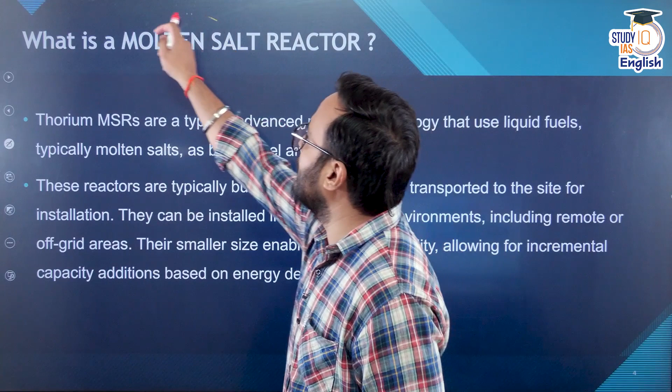Now let's talk about what is the molten salt reactor. We must have heard about various types of uranium powered nuclear reactors, where uranium is used as the fissile material, such as heavy water reactors or fast breeder reactors. There are different types of uranium nuclear reactors.

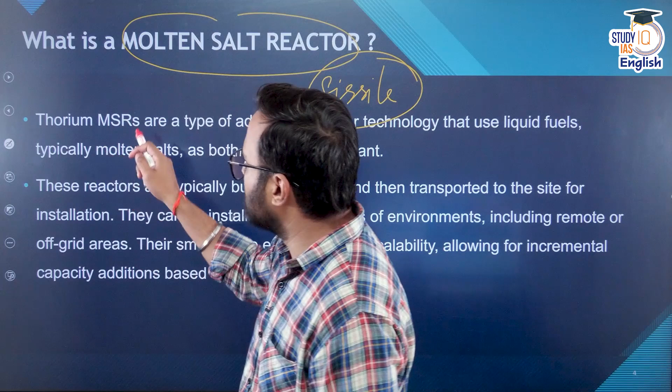However, if we talk about thorium powered molten salt reactors, these are a type of advanced nuclear technology that uses liquid fuels, typically molten salts, as both fuel as well as coolant.

The salt which contains the thorium fuel is heated up and converted to the molten state, and that salt is used as both fuel and coolant, because the inherent heat generated in this plant is lesser than in a uranium powered plant. At the same time, for the uranium power plant, due to the nature of the mineral, it was not possible to liquefy it.

However, here in the form of molten salt, there is a dual advantage: the same fuel being used in liquid form can also be used as a coolant. In uranium based power plants, usually heavy water or sometimes normal water is used as the coolant. There were incidents where molten sodium and other lighter metals were also tried as coolants, but those experiments did not succeed much. So typically heavy water was the most common coolant used in uranium driven power plants. However, here we are using the same molten salt, which is the fuel, as the coolant also.

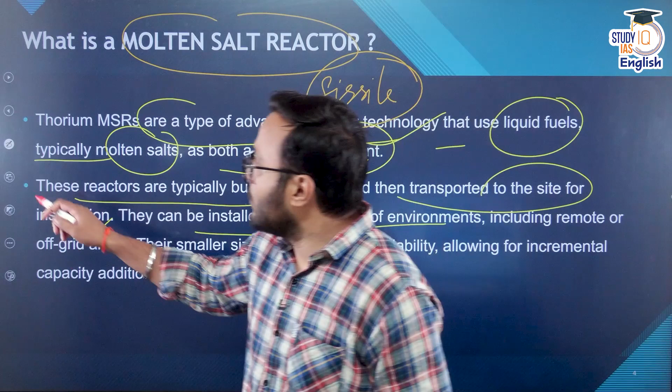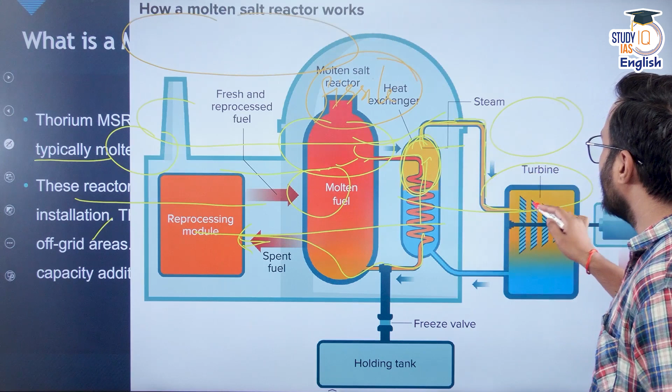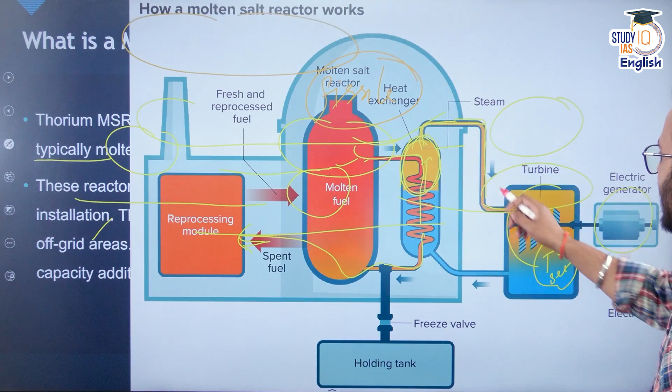So here the superheated steam is collected and moved to the turbine and generator, that is the TG set, turbine generator set. The turbine is moved with the help of steam obtained from the vapors of this molten fuel, and at the same time it moves the electric generator, producing electricity.

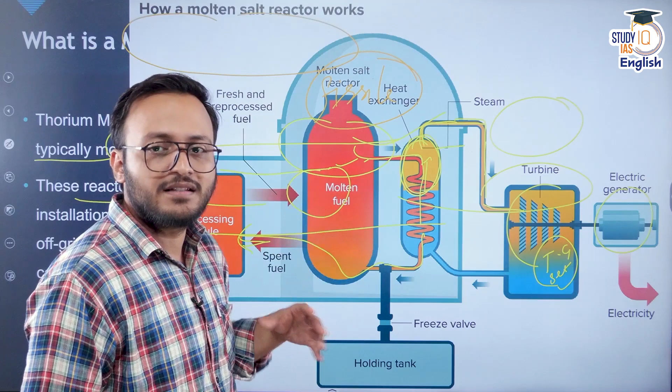Basically every power plant works in a very similar fashion. The ultimate aim is to move the turbine and the connected generator. How is the turbine moved? That's the most important part. In fossil fuel based power plants like coal thermal power plants or natural gas power plants, the fuel used to produce steam and move the turbine is fossil fuel. Here we are using molten nuclear fuel, molten salt as the nuclear fuel. Which salt? Thorium salt. I hope you got a very clear idea.

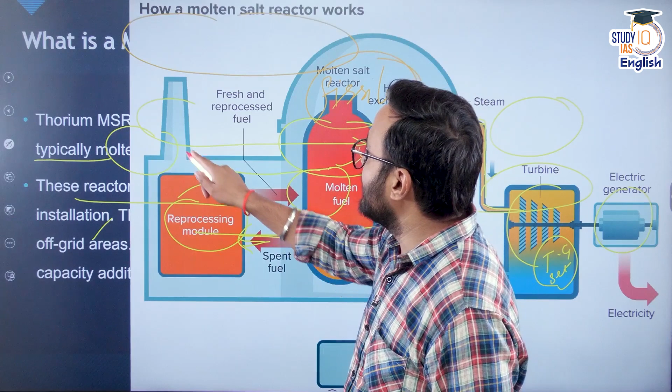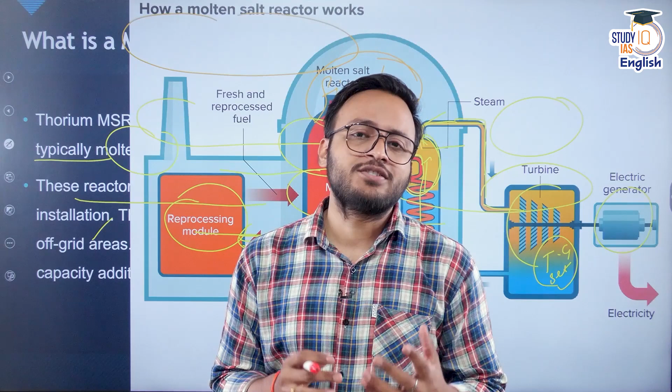Now, after the spent fuel is sent to the reprocessing module, we obtain fresh and reprocessed fuel which can be used again. This is the biggest advantage a molten salt reactor has over the conventional uranium powered nuclear reactors.

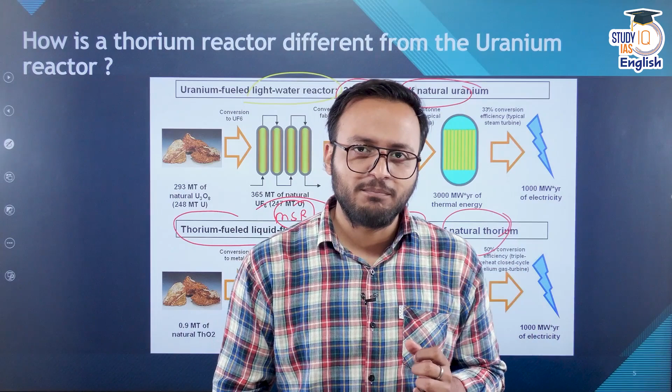The uranium obtained in the natural state, uranium-238, is not a fissile material. We have to get it enriched to uranium-235, or to uranium-239, which becomes plutonium. The 235 isotope of uranium is very scarce, so just 35 tons of enriched uranium can be obtained using 250 tons of natural uranium, giving us a huge byproduct, a huge waste. The 35 tons of spent nuclear waste needs 10,000 plus years of storage because it remains radioactive for more than 10,000 years.

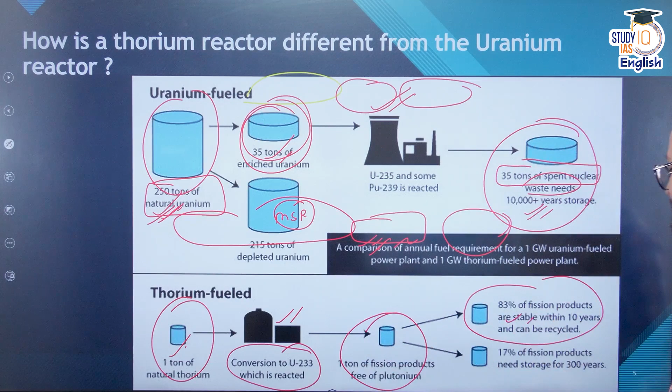Whereas with thorium fuel, just 1 ton of natural thorium is convertible to uranium-233, which is radioactive, and that 1 ton of fissile material is usable by 83%. Within 10 years, that 83% of the fuel becomes stable. Their half-life is over; they are no longer radioactive. Only 17% of the fission product used in the fuel remains radioactive, for just the next 300 years.

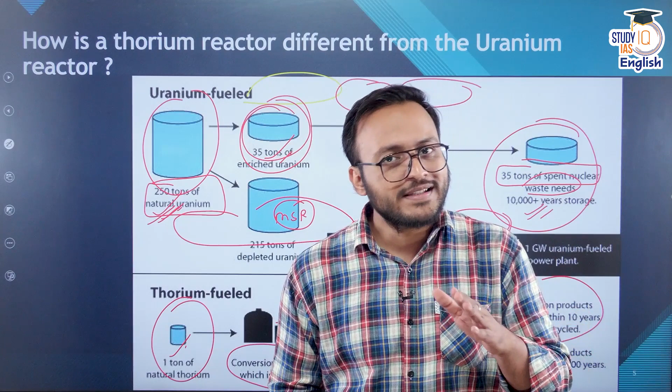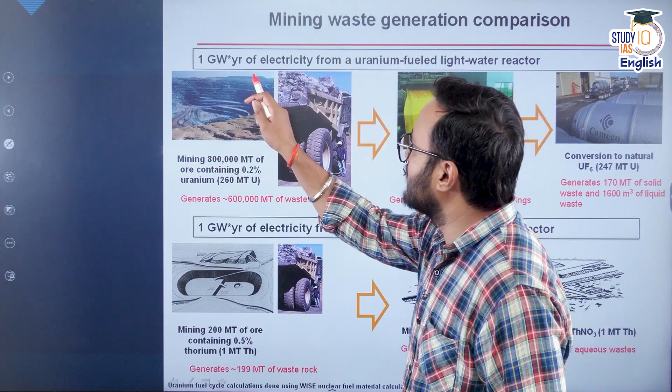So we can see from this diagram that a nuclear power plant powered by thorium produces less waste, and at the same time produces fewer radioactive materials after the fuel is spent. So overall, the waste generation in producing electricity from the uranium fueled light water reactor is very high.

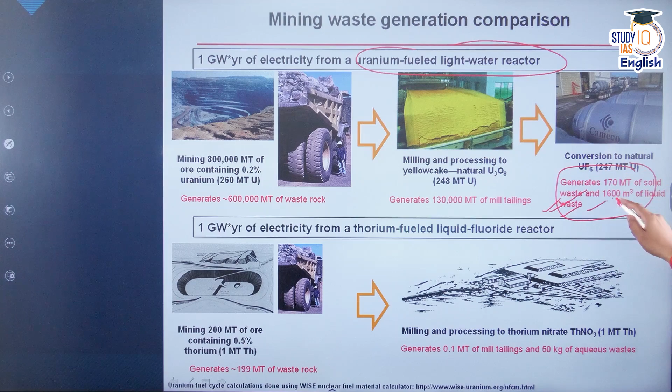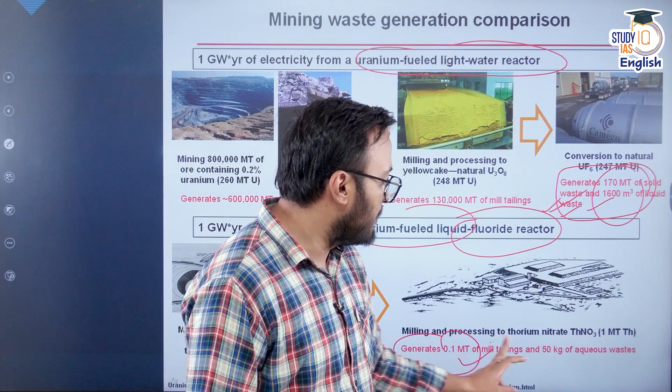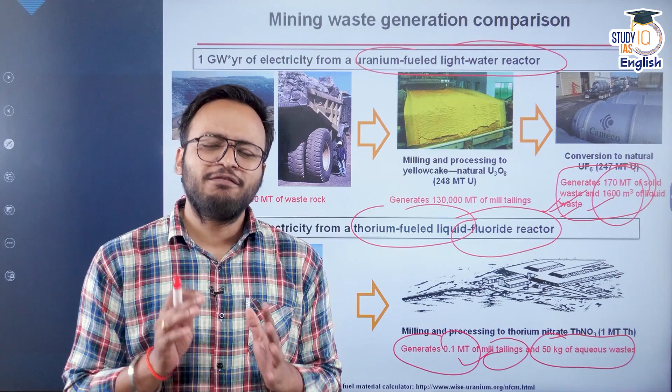As you can see, 170 metric tons of solid waste and 1600 cubic meters of liquid waste are generated. Whereas for production of 1 gigawatt-year of electricity from a thorium fueled liquid fluoride reactor, it generates just 0.1 metric ton of mill tailings and just 50 kg of liquid waste. Thorium generates very little waste. So overall, the safer future lies with thorium based power reactors.

Now let us summarize the comparative points we discussed. Fuel efficiency: the uranium reactor does very poorly compared to the thorium reactor. Establishment cost: the uranium reactor has a comparatively lower establishment cost because the technologies are readily available, not to all countries, but at least to nuclear enabled countries. But thorium reactors are still in the experimental stage, and that's why they bear a higher cost.

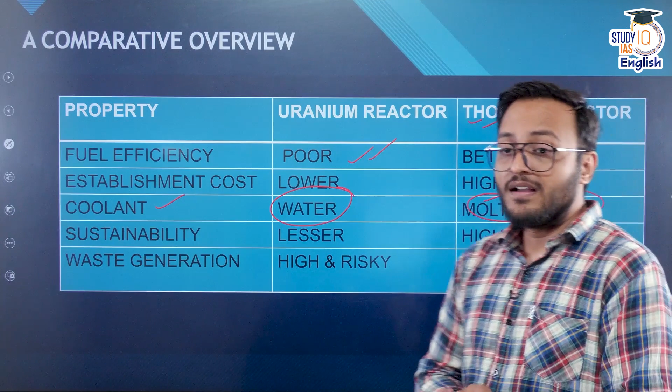The coolant used in the uranium plant is usually water, in variations like D2O, heavy water, or H2O, regular water. The molten salts used as fuel in the thorium reactor are used as the coolant as well. Sustainability: uranium reactors have lower sustainability, because we cannot rely on uranium based power plants for a longer period of time.

You might have heard the news also. Germany has decided to shut down all of its nuclear power plants powered by uranium. Why? Because the production is very, very costly. Not costly on the basis of the fuel charge or something.

Costly because of the environmental damages that it is doing. Costly because of the problems being faced while the burial of the waste that is produced. Right? So overall, we can say that it becomes a big challenge to make a sustainable utility of this reactor which is powered by uranium.

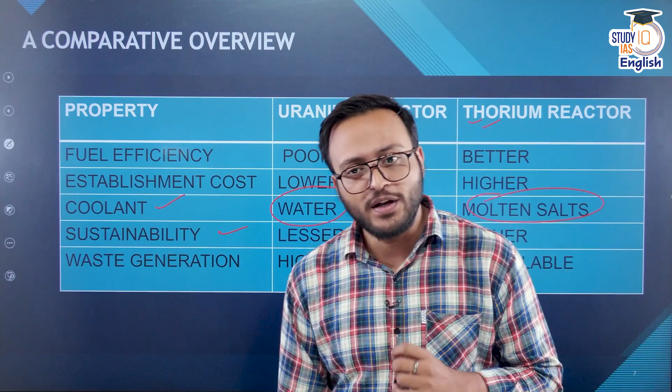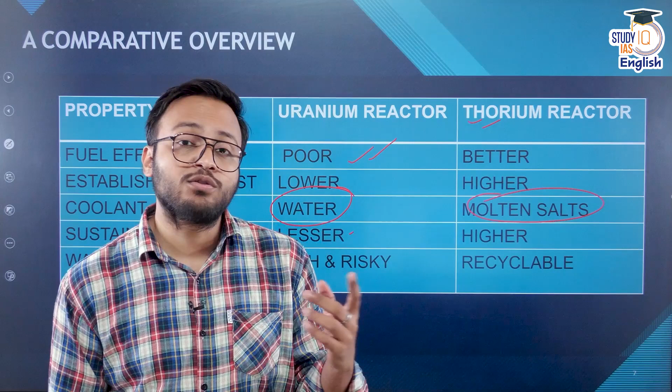And at the same time, the thorium reactor is having the chances of recyclability that is absent in the uranium power plant. So waste generation, we just saw that the uranium reactor produces extremely high wastes, right? And the thorium reactor produces very less waste, and also that waste is recyclable. At least 83% of the waste is settled down in just 10 years after it is generated in case of a thorium power plant, and 17% remains up to 300 years.

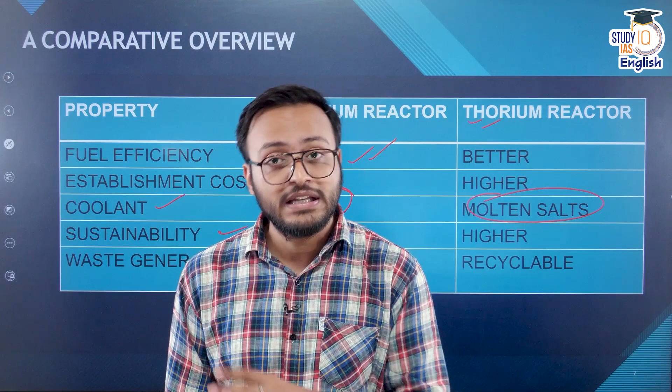Whereas the uranium reactors produce such waste which is radioactive, lasting for more than 10,000 years. Okay, it's a huge challenge to dump that waste. Now, if we talk about the earlier attempts, so like China, which is developing this new thorium reactor, is this the first time that any country is trying to develop a thorium reactor?

The answer is no. Even earlier, there was an institute called the Oak Ridge National Laboratory, that is ORNL, in the United States. It conducted the molten salt reactor experiment for 4 to 5 years, from 1965 to 1969. And it was successful in showing the feasibility of the thorium molten salt reactor. Why? Because it was getting the encouragement of US research scientists, and the federal government was also supporting it. However, due to the change in the government, they actually withdrew from this project.

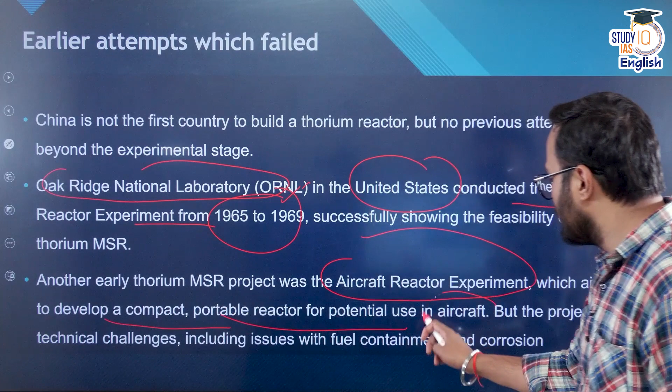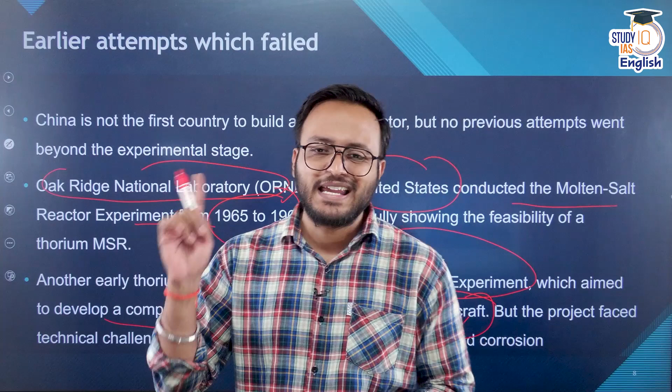Not just that, another early thorium molten salt reactor project was the aircraft reactor experiment, which aimed to develop a compact portable reactor for potential use in aircraft. So the fuel problem of the aircraft was to be resolved with the help of this portable molten salt reactor, which was again developed by the same ORNL, the Oak Ridge National Laboratory in the US. But this project also could not be completed because of the technical and financial challenges.

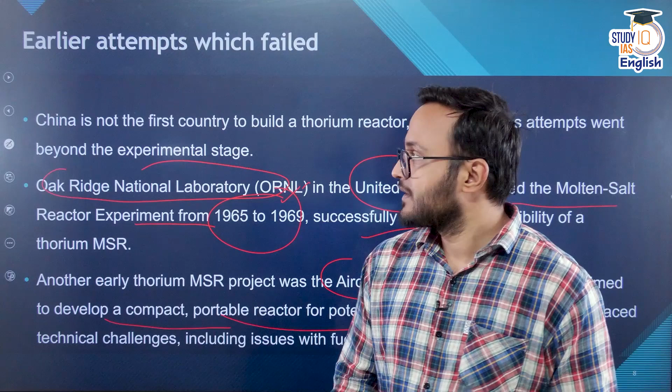Okay. If we talk about the current challenges which are lying in front of the same nuclear project in China. So guys, let me tell you that developing a thorium-based reactor, particularly for commercial use, has been a long dream for mankind. The big problems faced here: the first problem, the biggest problem, is to reach that critical point of operation. What is that critical point of operation? It is the point where the nuclear reaction becomes self-sustaining.

For example, in the initial stage, we have to provide the ignition, or we call it the initial reaction. Like in the case of regular fuel, for example firewood, first of all we have to strike a matchstick, right? We set a fire with the help of a matchstick. Only then the fire starts burning and the process becomes self-sustainable. Similarly, in nuclear power reactors, we have to provide the initial bombardment of neutrons so that a chain reaction starts in the fissile material. Fissile material is basically that radioactive nuclear fuel which can undergo nuclear fission.

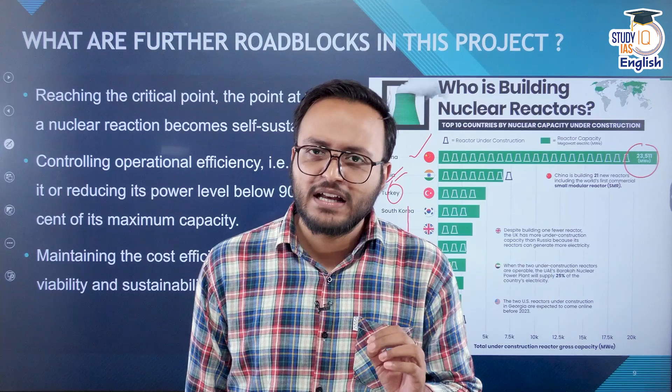However, if we talk about nuclear weapons, they are available only to limited countries, right? The members of the UN Security Council are officially designated. Apart from that, India, Pakistan, Israel, and probably North Korea and Iran are also said to have nuclear weapons. Okay, so weapons and power production are two different things related to nuclear products.

Now, what is the significance of this entire news and project? Thorium is a more abundant resource. As we all know, the world is facing a crunch of energy, a crunch of clean energy, and thorium, which is very abundant in nature compared to uranium, is going to be a great source of clean energy production, less risky than uranium-based nuclear power.

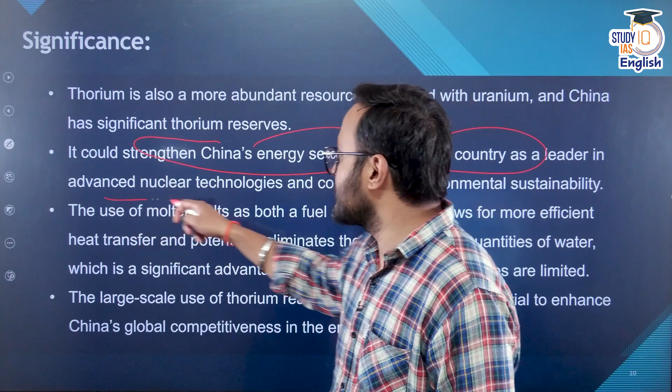At the same time, this can also strengthen China's energy security and position the country as a leader in advanced nuclear technologies, because thorium is found in numerous countries, but the thorium-based reactor is operational in China only. So it is like a first-mover advantage. That is the reason China is probably going to be the leader in thorium-based power production.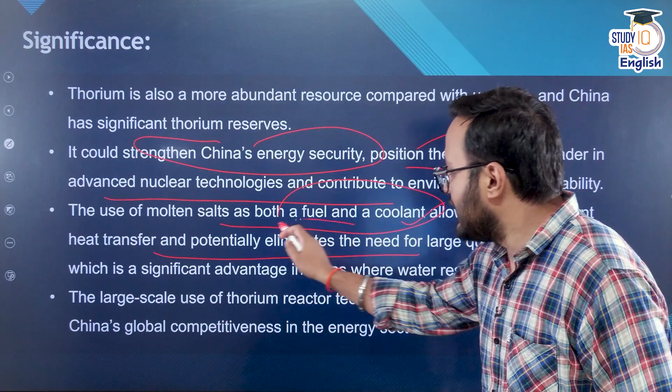The use of molten salts both as a fuel and as a coolant allows more efficient heat transfer, and potentially eliminates the need for large quantities of water. Till now, the need for water was a big challenge for every type of electricity production, be it thermal power, natural gas power, or uranium-based power plants. However, in thorium-based power reactors, the use of water in large quantities is going to be eliminated.

So this is useful even for areas which are remote, sparsely populated, and have lesser water resources. That means it can be very useful to develop the hinterlands in various countries. At the same time, the large-scale thorium reserves: China has a very good amount of thorium reserves.

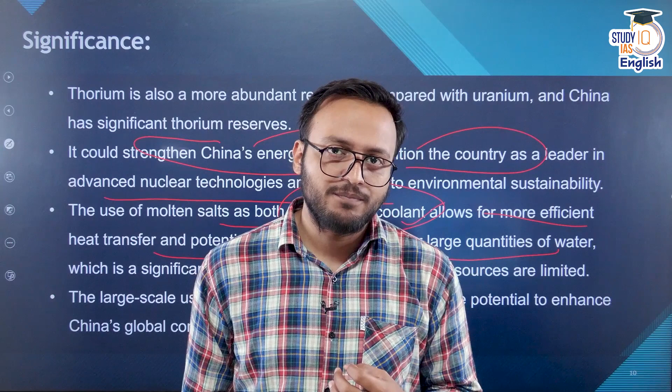However, there are several other countries, including India, which have bigger reserves of thorium. For them, it can be even more significant as a scientific innovation. So we can say that it's going to create a huge impact, not just for China, but for

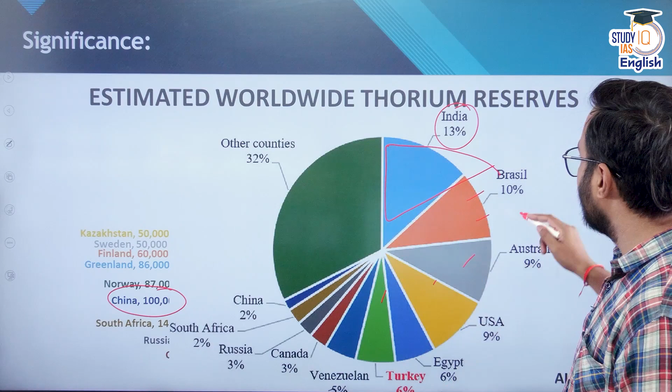So percentage-wise, we can say that India commands over 13% of the currently known nuclear reserves of thorium. Brazil 10%, Australia 9%, Turkey 6%, and China has at least 2% of the globally known deposits of thorium. Okay, so we can say that

this project is basically going to open the path of nuclear power plants in a new manner, because the conventional power plants based on uranium have also given several scars to humanity. For example, very recently in 2011, we saw the Fukushima nuclear power plant accident, and before that, we had the example of Chernobyl in the then USSR, currently in Ukraine.

So overall, we can say that despite the nuclear energy option, we were not in a very comfortable position to use it. But still, India is going to see a good number of challenges, because the invention is done by China, which is obviously against the strategic as well as other interests of India.

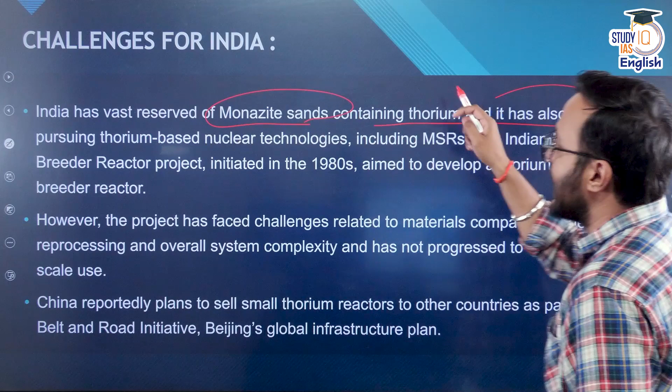India also has vast reserves of monazite sands containing thorium, and at the same time, it has also been pursuing thorium-based nuclear technologies, including molten salt reactors. But the Indian molten salt breeder reactor project, which started in the 1980s, had the target to develop a thorium-based breeder reactor, but it is still unable to reach the goal.

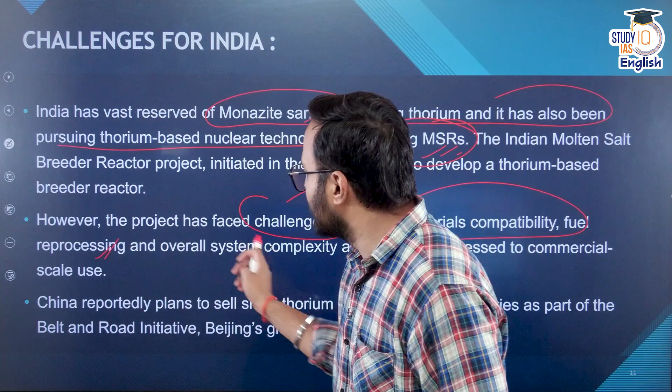Why? Because challenges came related to materials compatibility and fuel reprocessing, and the overall system was very complex and financially very demanding.

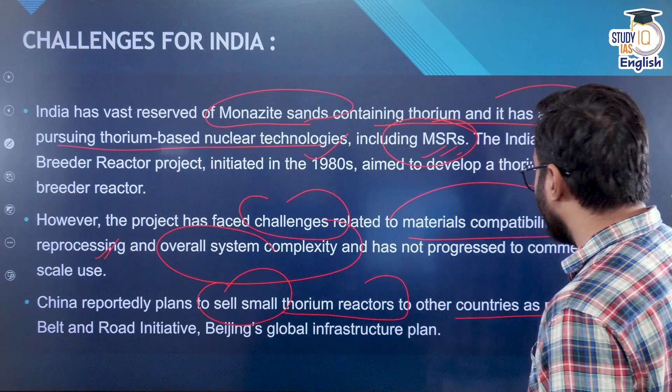On the other hand, another big challenge is that China is reportedly planning to sell these small thorium reactors to other countries as part of the Belt and Road Initiative, to enhance China's global infrastructure impact. Till now, China was constructing roads and industrial projects in the

countries located around India. Now we might also see it sell nuclear reactors, which, as I told you, are very scalable and very portable in size. So that is going to be a big challenge for India in the upcoming years.

All right, everyone. I hope this session has given you a good overview of the news from China, where it has granted permission to start construction of the thorium-based power plant. If you are wondering which part of the UPSC paper this is important for, it is going to be important for the prelims GS portion as well as for mains GS3. The Mains GS3 question paper, that's again very important.